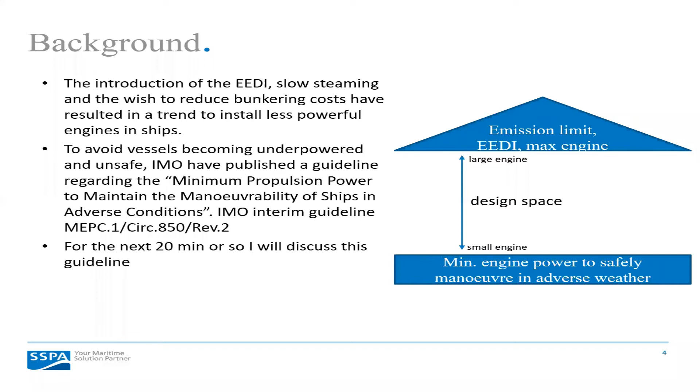Now, broadly speaking, this IMO guideline gives you two different ways to show compliance. We've seen both of them a little bit in the previous presentation also. First, there's a simple level 1 assessment. This is a straightforward generic method, which is based on installed power of existing ships. This uses deadweight and ship type as the only inputs and then spits out a minimum power. And then there's the level 2 assessment, which is a bit more elaborate. This is based on individually calculating various ship resistance components and carrying out a proper power prediction based on those resistance forces.

Now I will today go through both level 1 and level 2 calculations and also discuss challenges and loopholes in those IMO guidelines. And for this, I will use the well-known KVLCC2 tanker as an example. Now, compared to smaller tankers like Aframaxes and so on, VLCCs are usually not critical in terms of minimum power in real life. I will nevertheless use the KVLCC2 today because it's open source. You can find a lot of information in the literature, and it might serve as a very useful benchmark case.

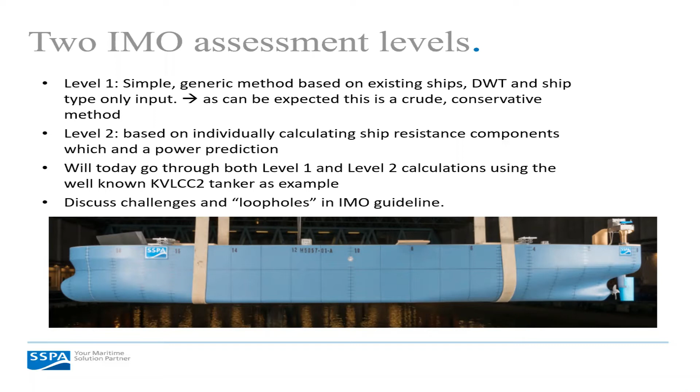So a bit out of sequence, but I'd like to show you some results first. If you carry out the simple level 1 assessment, you will find that the minimum power is slightly above 25 megawatts for the KVLCC2. If you carry out a level 2 assessment, it's around about 9 megawatts. So there is a significant difference between the two assessment levels there.

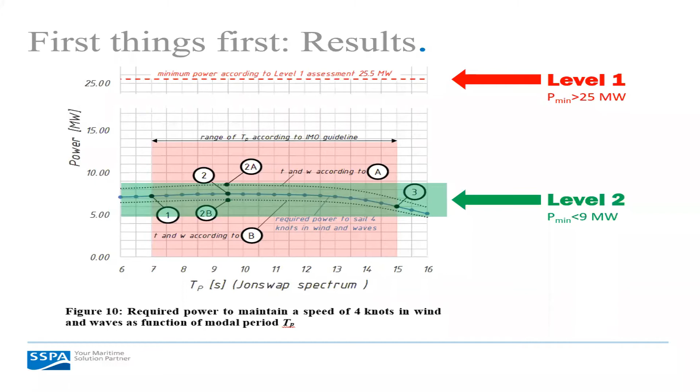Luckily enough, the simple generic method is conservative, but it's also very, very conservative for this VLCC, at least. So I would say that no serious ship designer would want to rely on the level 1 method, really. And yeah, we can take a closer look at the two methods. Here's just one slide about the simple level 1 method.

Down here, top, can you see my cursor now? Yes, we can. Okay, good.

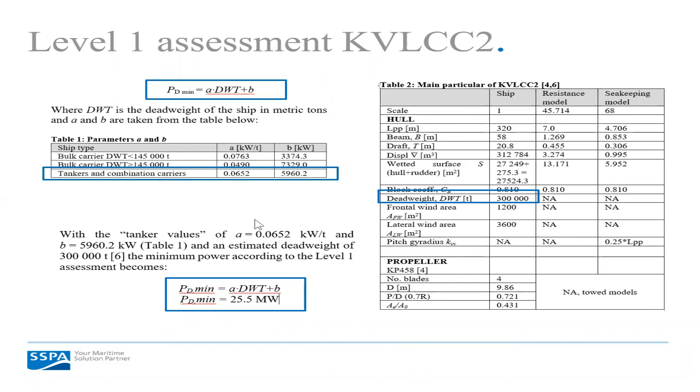So here in this box, this is really the level 1 assessment, which spits out a minimum power as function of deadweight tonnage and coefficients A and B. They are tabulated for various ship types. And if we assume that the deadweight of the KVLCC2 is about 300,000 tons, you enter those tables and it spits out 25.5 megawatts as minimum power. So this is what we've seen on the previous slide. It's very conservative, and there's a point of looking at the level 2 assessment also.

Now, the main assumption and starting point of the existing level 2 assessment, and this is really the key point here, is that your ship is safe and the engine big enough if you can maintain a certain minimum speed in head waves or a headwind of a certain strength and corresponding waves. So what IMO effectively does is they reduce the safe maneuvering problem to a 1 degree of freedom problem, to a force balance really in the x direction of the ship.

And then this minimum speed, or the minimum required ship speed of advance, as they call it, depends on the relative size of the rudder compared to the ship. And it varies between 4 and 9 knots, depending on ship parameters. And then IMO requires that you maintain this speed in adverse weather conditions, and they define those weather conditions as Beaufort 7 to 8, also depending on ship size.

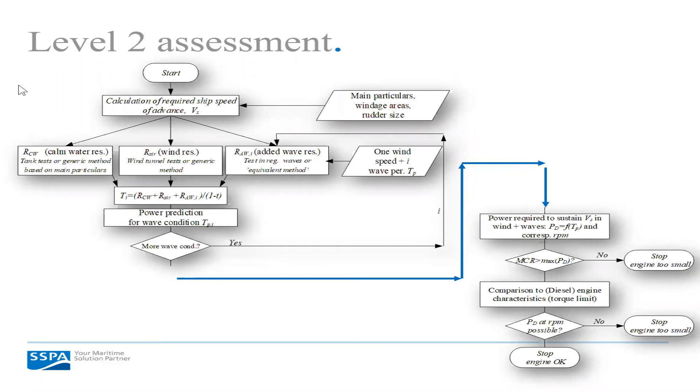And then hopefully your engine is big enough and you don't bump into the torque limitation line and then you're fine, or well, maybe you're not. So this is really how this level 2 assessment works. And I will go through this a bit now, using this KVLCC2 as an example.

Now, as I've said, the required ship speed depends on main particulars. It depends on ship length, LPP, on draft, beam, and it depends on rudder area and frontal and lateral wind areas. And depending on ship size, it's between 4 and 9 knots. For the KVLCC2, it turns out to be on the low end. It's 4 knots. So we need to make sure that whatever engine we choose now, we can maintain those 4 knots in the adverse conditions.

And adverse conditions, and this is a bit special about this particular IMO procedure, they're not defined as one single wave spectrum or wind condition.

They're defined as a range of spectral periods, and I've plotted 3 of them here. So IMO says you need to be able to maintain the speed in JONSWAP wave spectra with periods ranging from 7 to 15 seconds. You can see those 3 spectra within this range in the plot down the bottom, spectrum 1, 2, and 3. We will see them again and again in my presentation now.

The blue one, spectrum 1, is the lower end of the spectral range, and the green one, spectrum 3, is the higher, the 15-second end of this range. So keep in mind, it's not only one power prediction which we need to make. Now we need to make sure that for all of those spectra between 7 and 15 seconds, we can maintain the 4 knots.

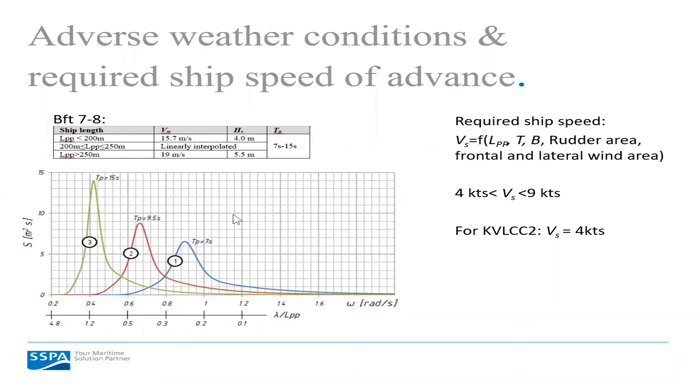Coming back to our roadmap, we've now worked out the required speed. We've worked this one out, it's 4 knots. And now we can start looking at calm water and air resistance and calculate it at those 4 knots. Down the bottom here, you've got the equation which IMO gives for the calm water resistance. It's based on a form factor which IMO recommends to take from model tests. Well, they recommend taking it from model tests, but also give a generic main particular based alternative to calculate it.

At SSPA, we've done model tests with a 7-meter model, a relatively large model of the KVLCC2, in our towing tank in calm water, and using this equation up here and the results from the tests, we end up with 126 kilonewtons full scale for the KVLCC2. If you use IMO's generic equation, you're slightly above it, about 6%, you get 134 kilonewtons. So now we've got calm water resistance.

We can look at wind resistance, air resistance also. The IMO guideline gives this equation up here. And they also recommend taking the resistance coefficient C air from model tests, which means wind tunnel tests in this case. But they also, again, give a generic alternative where they say the coefficient is 1. So based on model tests for the tanker, we get 307 kilonewtons, and again, slightly more for the generic expression. So far so good. Now we've got those 2 resistance components.

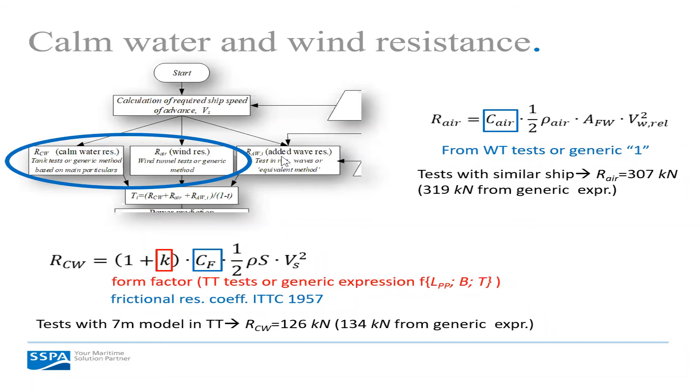We still need the 3rd one, the added wave resistance component, and this one proves to be a bit more tricky. First of all, because the IMO guideline is not very specific how to determine it. They say it should come from tests in regular waves, but they don't really say how those tests should be carried out. And well, it's quite ambiguous. They also say it could come from an alternative method verified by the administration. So yeah, you don't really know what to make of this.

The second reason why it's very tricky to determine this added resistance in waves is because the model testing itself is not straightforward, and this is because the tests have to be carried out at very low speeds. You need to keep in mind this is 4 knots. Usually tankers are tested around 12 knots, 15 knots, so it's like a quarter or a third of the speed that we usually have.

This means, first of all, you need to have a very wide basin, not really a tank, because as you go into your regular waves, your ship will start to generate its own waves from heaving and pitching. They will eventually meet the walls of the basin or the tank and get reflected back onto you. And at 4 knots, you need to have a very wide basin so that you can outrun this wave system before it interferes with you. So it's impossible to do those 4 knot tests in a tank. You need to have a basin, really.

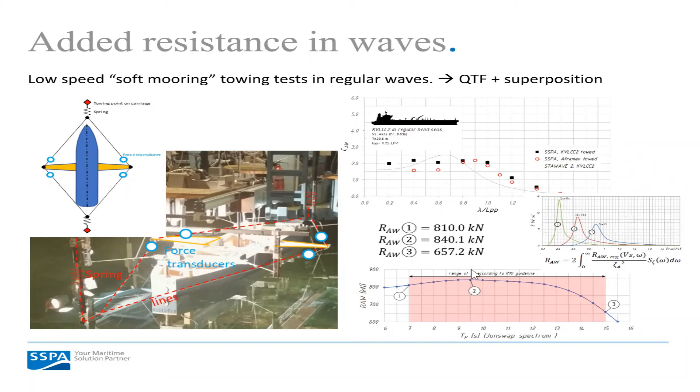And here down the bottom, I've plotted it for the full spectral range from the IMO guideline, 7 seconds here, upper limit 15 seconds here. And you can see that there's a very shallow peak here for spectrum number 2, somewhere in the middle, of around 840 kilonewtons. So this was our missing resistance component, really. So now we can really work out our thrust, or almost. We still need to have the thrust deduction factor. I come to this in the next slide, but we can also have a quick look at the relative size

of the resistance components. So in spectrum 2, which was the one with the highest added resistance, you see that the whole problem is really dominated by the green added wave resistance, wind resistance second, and then the calm water resistance, for which we've carried out dedicated towing tank tests, is really quite small compared to the other components.

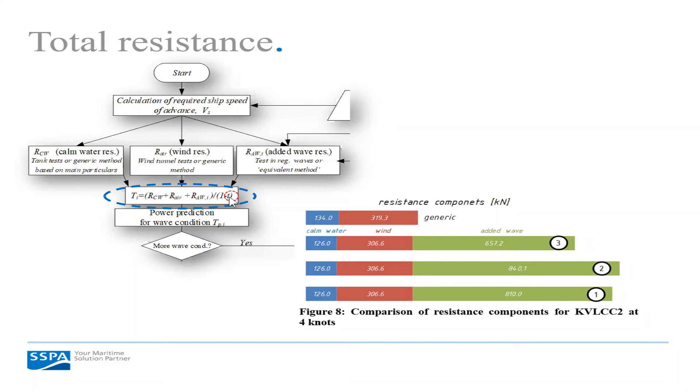Now, IMO recommends to do model tests to work out this thrust deduction factor, and they're unfortunately, again, not very specific how to do this. It's again tricky because all this is at 4 knots. It's not the normal self-propulsion and resistance test that you carry out. It's very low speeds. And for VLCC tankers, I've plotted the thrust deduction factors and wake fraction factors, which we will also need later, from various sources in those 2 diagrams, which you can find in the proceedings.

Now, there's a lot to say about those 2 plots, but the main point is that the IMO generic values, the red lines here, they're not necessarily conservative, and the choice of propulsive factor does have a significant effect on the outcome of the minimum power calculations. To illustrate this, I looked at 2 scenarios. I call them scenario A, which is conservative, and scenario B, which is optimistic. And based on those assumptions and with the resistance values from the previous slide, I've made some power prediction, which I can show in the next slide.

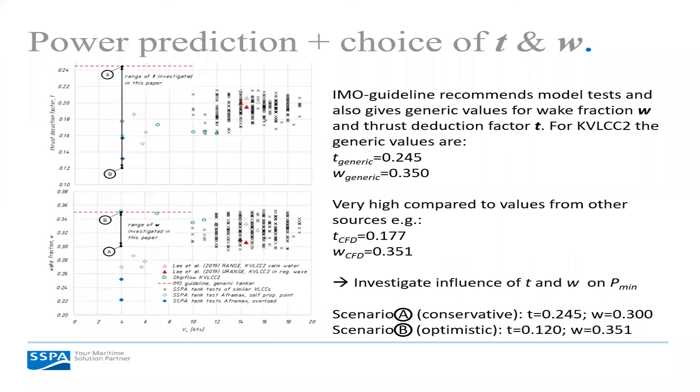So here finally you've got the required power as function of the spectral wave period. And to sail with 4 knots in spectrum 1, you need about 7 megawatts, slightly more for spectrum 2, and then again less for spectrum number 3, so highest power somewhere here. And then these are 2 black dotted lines. There's scenario A, which is conservative, and scenario B, which is optimistic. So here the difference is about plus minus 1 megawatt. So it's quite significant that you choose T and W correctly.

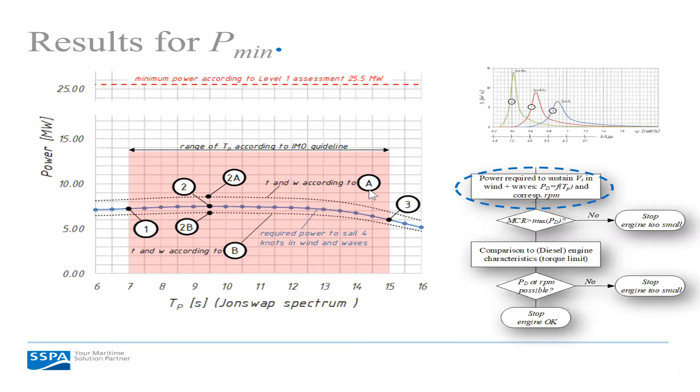Then here again, you've got the 25.5 megawatts from the level 1 assessment, and as you see, it's literally off the chart. It's really conservative. Now we've worked out a power, but we still need to check that our diesel engine can actually provide those powers at the corresponding RPMs which come out of the power prediction. And this I've done here in this slide. You've seen this before. You've got RPM or engine speed here, and delivered power on the vertical axis.

And here the green line is really the torque limitation line. You might remember this from the previous presentation. So if you bump into this torque limitation line, it means that your engine can no longer provide the nominal power, which is up here.

In a way it's like going uphill in 5th gear without being able to shift gear on your car. You really want to do something here. The propeller is totally overloaded, but with a fixed drive and no CP propeller, you can't do anything about it. So in this case, you won't get out the nominal power.

Now I've plotted the required power values for the 3 example spectra into this diagram. The points 1, 2, and 3 here. And there's also a point 2A, which is a pessimistic or conservative variation of point 2, and the optimistic point 2 variation here.

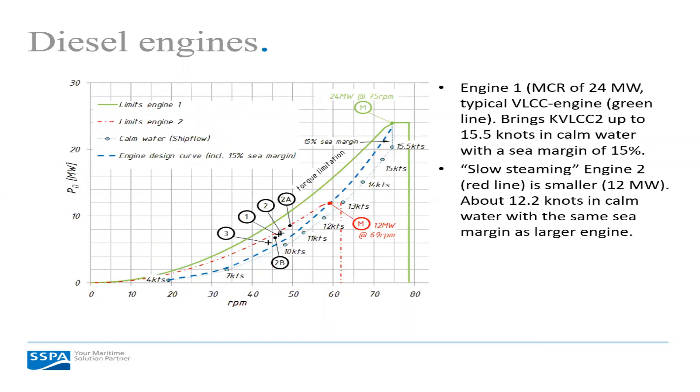So it's important that you get the t and w right, and the IMO guideline as it is is not really clear about how you should determine it. So I think there's some room for improvement there. And this really brings me to the conclusions of my talk.

We've seen that the level 1 assessment from the IMO guideline gives us a minimum power of 25.5 megawatts. If we follow this more advanced level 2 assessment, including the power prediction and so on, this power reduces to 12 megawatts. This is the red engine from the previous slide, which had an MCR of 12 megawatts.

We've seen that it's important to consider those torque limitations for diesel engines because the propeller is highly loaded, really overloaded in those conditions, and operates far away from its design point. Those 12 megawatts from the pure power prediction were 9 initially, but we needed to choose 12 in order to not bump into the torque limitation of the engine. So it's important to consider this.

Then an analysis of the resistance components shows that the total resistance consists of about 10% calm water resistance, 24% wind, and 66% added resistance in waves. So RAW is really the dominating part here, and it's important to predict this correctly.

The IMO guideline unfortunately neither specifies details of how this should be determined experimentally, nor does it give a generic way to determine it. This is different from the calm water and wind resistance components, where you also had a generic main parameter based equation, but it's totally missing for added resistance.